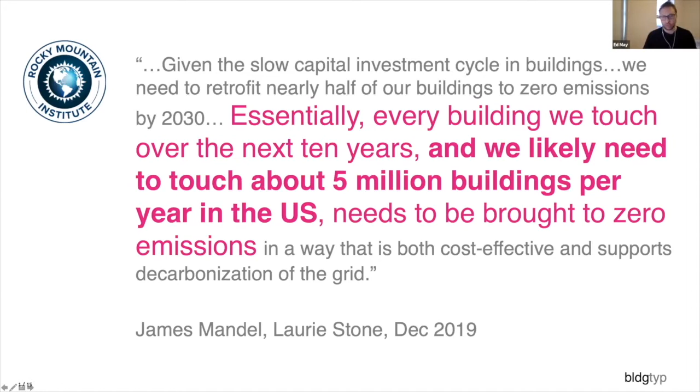So 5 million buildings every year for 10 years. I know this is a happy hour, so I'll do the math. How'd they get that number? It's about 113 million buildings in the US. You want to retrofit 50% of them over 10 years? There's your 5 million buildings a year.

Well, what does that mean? Let me put that in human numbers. It's about 400,000 buildings every month, or to put it a slightly different way, about 13,000 building retrofits to a zero emissions level every single day for 10 years.

To make it even more real, if you're an architect or designer working in the US, there's about 21,000 architecture companies in the US. That would mean your firm would be responsible for about 250 zero emissions building retrofits every single year for 10 years, assuming architects were involved in every one, which isn't always true, but let's say for the purposes of argument this is the order of magnitude we're talking about.

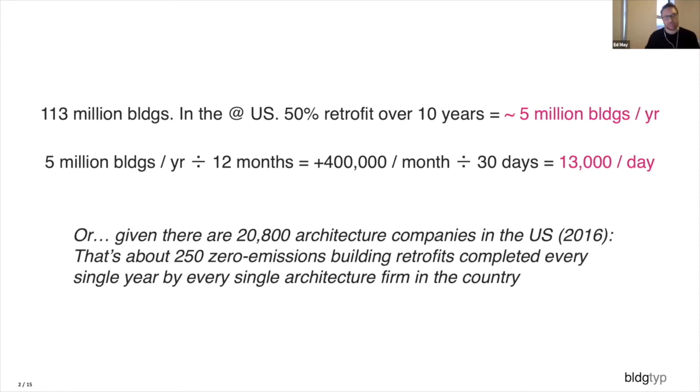Now that's a big challenge, a big undertaking obviously. What I'd really like to talk about on this call is not so much the policy or finance challenges, but our side of the equation as designers, engineers, architects - the tools, design, and process side. I'd like to pose a question to everyone, just as a thought experiment: set aside those enormous policy and financing challenges for a second.

Let's just say, for purposes of argument, the finance people get their act together. They come to us someday and say, guys, we found the money, it was between the couch cushions, it's time to get building, let's go. I want to ask: could you scale up your own Passive House design and engineering process to handle even a fraction of that demand, even a fraction of that amount of work?

Could you do it? Seriously, given how hard you work now, the hours you work now, the time you spend now, how little you see your kids now - could you do it? Could you really scale up your process to accurately, efficiently, and quickly output that level of work? And given that your name goes on every document that goes out the door, would you stand behind it, would you be confident it's accurate? What would it take to actually do it well? Could you?

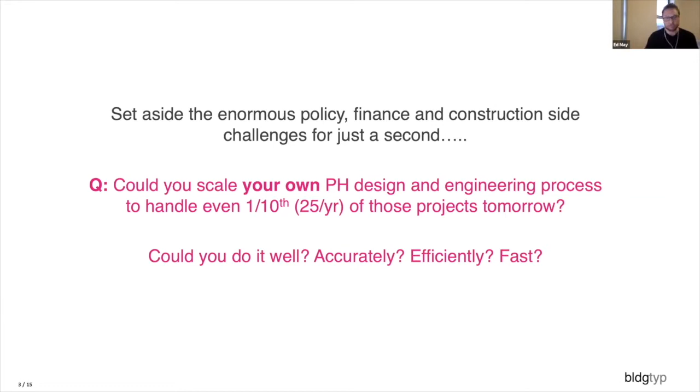Yeah, no, that's what I thought. It's going to take a century's worth of Saturday work to meet a challenge like that, given our current process and timeline for Passive House projects. Now that's not true of everybody's firms - some of you have amazing firms, maybe you're thinking, that's fine, I could totally do that, we could do 250 zero emissions buildings tomorrow. If so, awesome. But most of the firms, myself included, would mightily struggle to attempt even anything close.

So I want to ask, in the few minutes we have together as a community here, what kind of techniques can we use to improve our own accuracy and speed? How can we get better? How can we do a better job of doing our job? How can we deliver better projects? How can we do more of them, better and faster?

I don't know the answer, but I'd like to offer just one partial solution that has worked really well for us in the past. I'll offer a couple examples, and then, as I said, I'd really like to hear other people's thoughts and opinions on these kinds of things.

So the solution I'm going to offer comes from a completely different industry. I actually started out as a builder long before I ever became an architect, long before I ever started doing Passive House projects. In the construction industry, and particularly the woodworking industry, there's this idea of a jig. It's a really simple idea. Sometimes you have to do something really hard, sometimes you have to do something many times.

Sometimes you have to do something really fast. So you take some time and you make yourself something kind of sloppy, something fast, something quick, often kind of imperfect, to help you do your job better, faster, more accurately. And I'd like to pose the question: could that idea, that model, that metaphor be applied to the design profession?

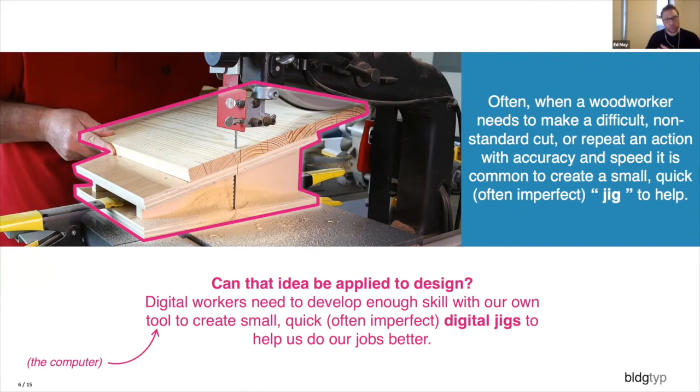Let's take a problem that we run into all the time. You're going to deliver zero energy buildings. You need to model them effectively. We're modeling these buildings and it's a huge amount of data. The data is not getting smaller, the amount of data is not going down. We need to figure out how to manage immense amounts of data. Okay, that's a big problem.

That's a large problem. Let's make it more specific, take it down to a really specific level. How do I manage room-level data? Room numbers, room names, TFA, floor area, volume, fresh air flow rates, air handling hookups—all of the various bits and pieces of information at a room level that I might need to manage in a building information model.

What tool do I use to do that? Do I use a spreadsheet? Do I copy and paste things from here to there? Well, there's not really a tool, is there? I mean, maybe there is, maybe you guys have one—I'd love to hear about it, but I don't know of a tool that does that really well in a passive house context. So let's make one.

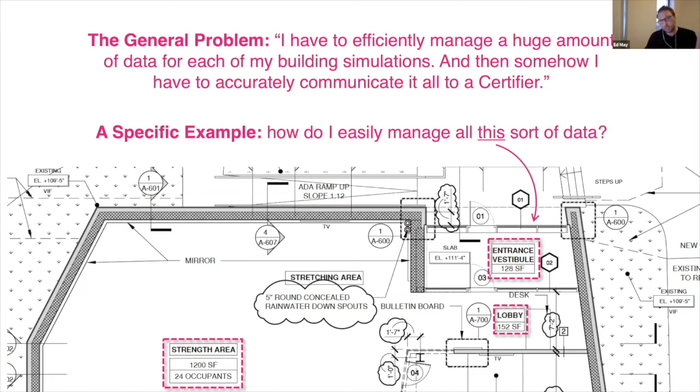Right? We're working in SketchUp, we're doing WUFI Plus modeling, we're doing designPH modeling. We're using SketchUp—that's a fine tool, it's not a great tool, it's a fine tool. So let's build ourselves a little digital helper.

It's about 2,000 lines of code. It's fast, it's quick, it's easy. It's not very sexy, it's not a piece of software—it's a small digital helper to help us do our job better.

And always with an eye towards data flow: the data that flows in has to flow out, it has to flow out to something useful. It can't stop in the Excel model or the WUFI model—it has to flow out to a document, to an actual piece of paper that can be used in a certification context. So we build the tool so that all of that data flows seamlessly from end to end.

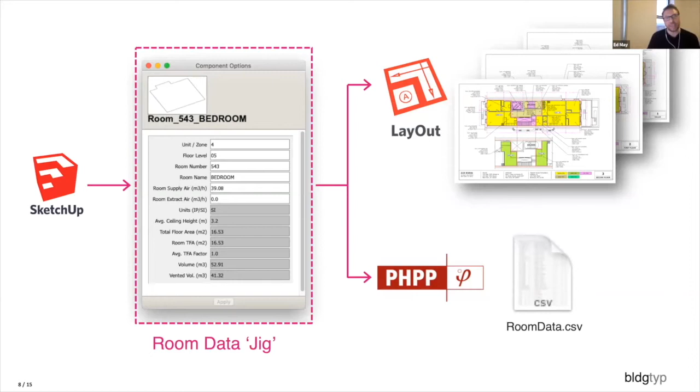How might we use this? Well, we're using it every day on projects. This is the kind of tool we build—we use it on all of our projects to help us do our job better, faster, more accurately. This is a renovation project in Manhattan we're working on with Mike Ingui and his team. Great project, commercial on the bottom, residential up above, multifamily, mezzanine levels, complex interior floor plate.

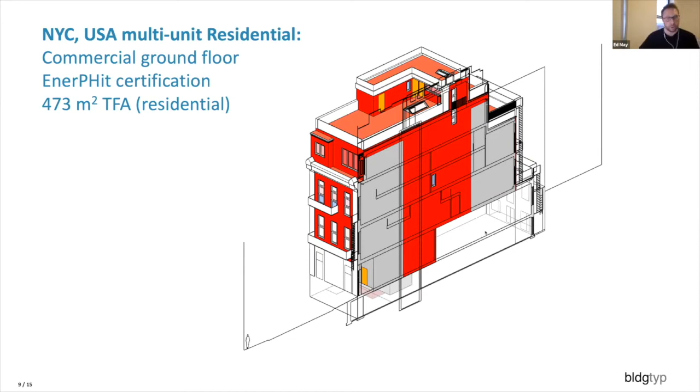How do you manage it? How do you manage the data? You gonna make a spreadsheet, copy and paste? No, you're gonna make yourself a building information model. If there's not a tool that exists that allows you to manage the information you need to manage, you're gonna build yourself a tool, and you're always gonna do it with an eye towards data flow. So all the data that flows in has to seamlessly flow into both the physics model—the energy model—and your final certification documentation and error checking documentation on the back end.

We're not going to do things like write tags about information—we're going to make it so the data actually flows seamlessly into those tags. The computer does the hard work of remembering all this stuff, because you won't remember it. I know I won't remember it. I'll do it wrong, I'll type it in wrong, I'll get a decimal in the wrong place. We're going to make the computer do the hard work there.

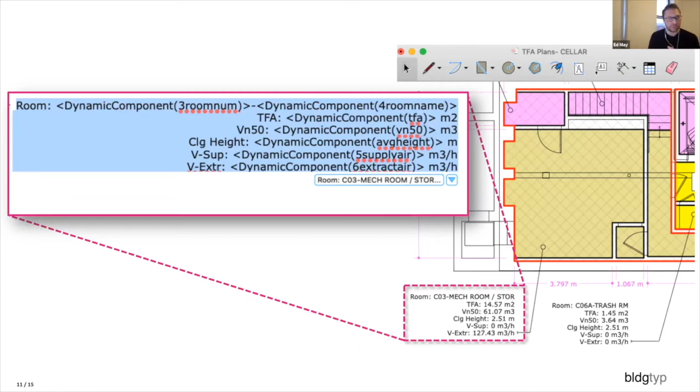That's one super small example, one really hyper-local example of the type of thing we're talking about. Let me offer a slightly more extended example. This is the workflow that we're working with right now.

So for most of our projects nowadays, we've shifted platforms away from SketchUp—not to get too deep into the weeds on the tools, but SketchUp doesn't seem to be a great tool for data management. We're using Rhino, a much more robust information and data management platform. It allows us to do a lot more things, a lot more customizable, a lot more transparent—that's a really important quality in all of our tools that we prize. We're using this to simultaneously create dynamic models and PHPP models from a single source building information model, using a tool we internally call IDF to PH.

If you do Energy Plus modeling, you know IDF files. We're able to translate back and forth between IDF files and passive house files, or PHPP files. But the important thing here is not the physics modeling. That's all pretty well understood at this point.

That's pretty well managed. The important piece here is about the data flow in and the data flow out. So we have a whole new set of tools that we're using to push data in and manage data. And just as importantly, on the back end, we've got a bunch of data flowing out into an automated reporting tool. In particular, we're using a web-based reporting tool. So, yes, we used to do, and we still do, quite a few PDF reports, make a bunch of Excel graphs.

That's not great, right? That's not a great process. That's not very automatic, and it's time consuming. It's prone to user error. It would be much better if we could come up with a process where the data flows seamlessly from your data, your building information model, through the physics model, and manages the fire hose of data that comes out of those physics engines, those physics models, whether it's PHPP or Energy Plus or what have you.

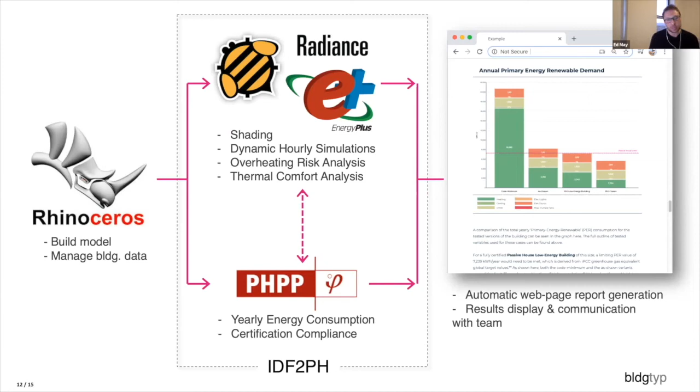So we do an automatic web-based reporting that parses through the data, scrubs the data, turns it into something human readable and manageable. What does that look like?

It's really straightforward, right? So there is no building information management tool to do that in Rhino currently. Okay, fine, build yourself one. So a couple thousand lines of code. You're gonna manage component libraries, windows, surfaces, TFA, domestic hot water, thermal bridges. It's no different than DesignPH. It's not hard, there's no rocket science here. You build yourself a tool to manage the data properly.

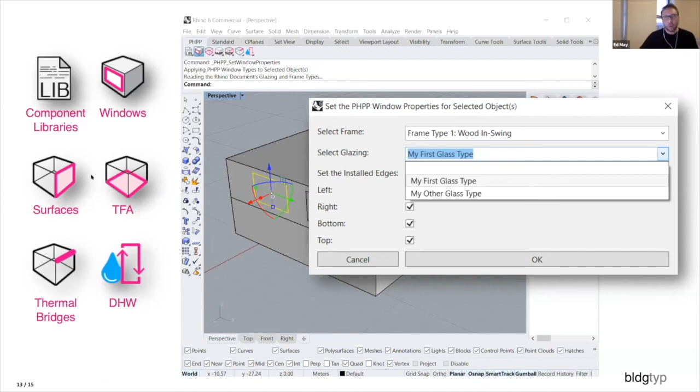So all the data gets input in this information management, or building information management, tool. And again, on the back end, we're going to use a web-based platform to allow us to see and parse that information very easily. So this is just an example of the type of web page report that we create now for projects.

This is obviously just a small single family project. This is an automated report. So this is rigged up and connected to the PHPP. And the important piece here is that it's a live web page. So all of this data is updated as the PHPP updates.

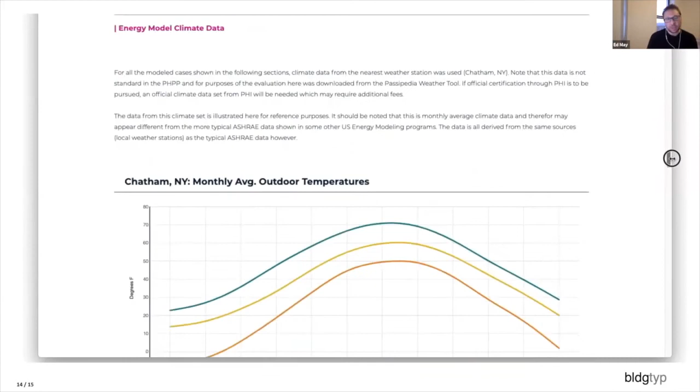The whole team is able to see the updates in more or less real time as we choose to update them. But the most important part is that it's code. They're not pictures, they're not JPEGs, they're not copy paste, they're not screenshots out of an Excel model. It's code, it's building itself.

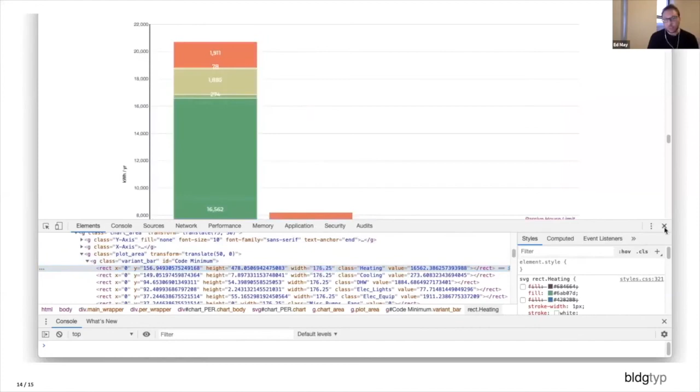We don't build the web page. We set up the structure, we feed it the data, and it creates the model every time that we update our PHPP or we update our modeling. It radically improves the amount of time it takes us to create a product like this.

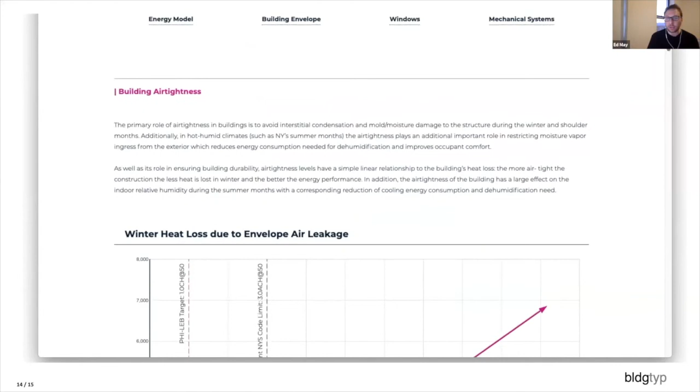In addition, I just want to show here, I like this part very much. We added in a little bit of section here so that we can manage additional data in addition to the stuff that just comes out of the model. We're also able to log things like our inputs. So for instance, I have to keep track of all my wall assemblies, different materials. Well, keep track of it all inside of something like a web page, right?

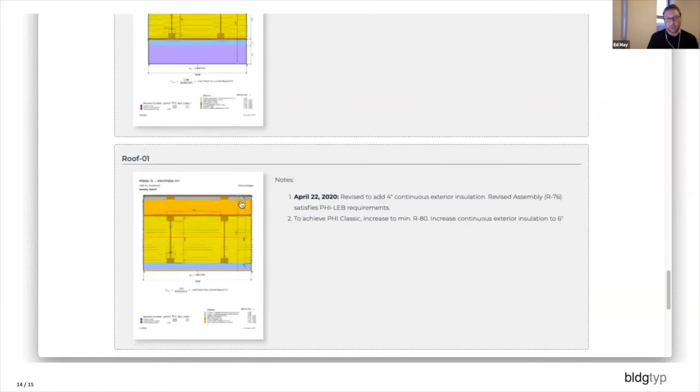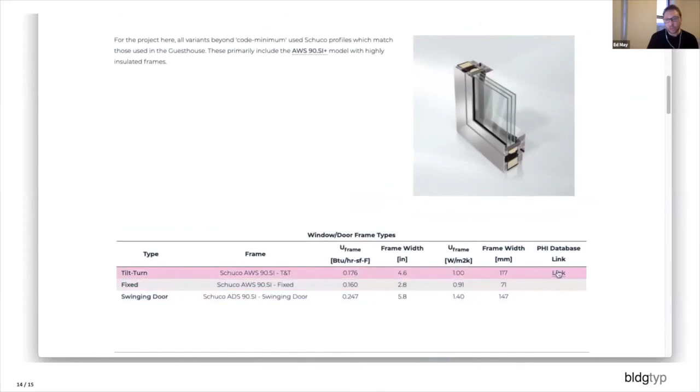That's going to be better than some dead Dropbox folder. Keep track of communications with our contractor friends. We're able to submit details through them. We can provide links to different products that we might like. All of this, again, is largely automated and live. It's rigged up right to our information model.

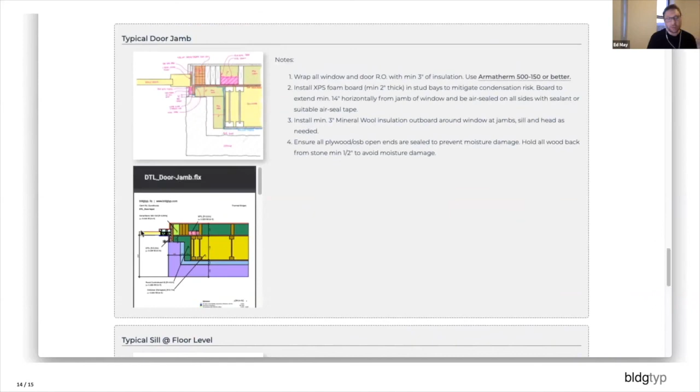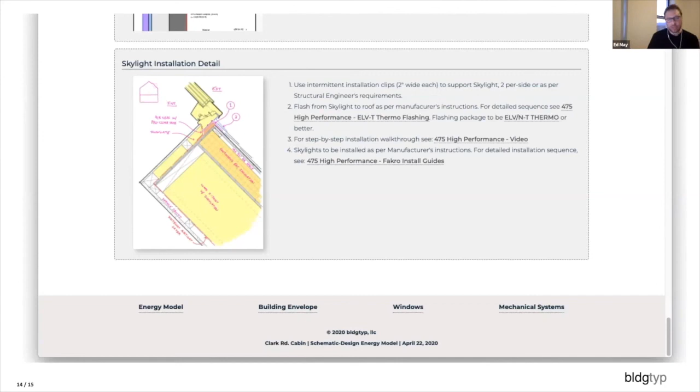We're able to do things like shading calculation and again, represent that relatively quickly. The important part here is the data flows very easily from one to the other. We have all our thermal simulations, we have window and door details. All of that stuff can easily get logged in something like a little mini project website here. It's not a big Procore site. It's not very high tech. There's really nothing fancy to it, but it allows us to manage that data really efficiently.

And again, the most important thing here is that we're making the computer do the hard work. I'm not very good, I don't pay attention to things very well. I can pay attention once, but as soon as I have to do it again, I start to lose track and I start to screw things up. So I make the computer do all the hard work. You build the structure and you let the data flow and you let the model work.

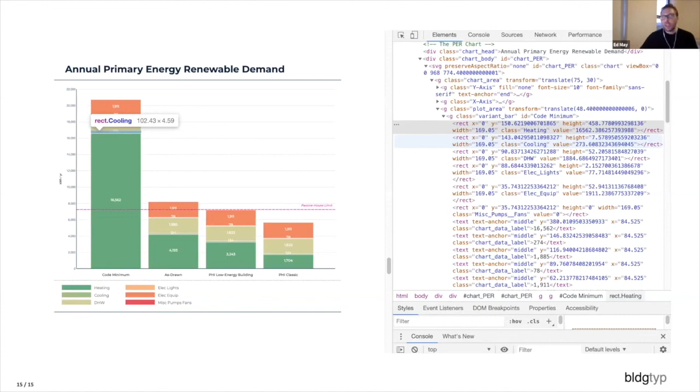And so I would like to propose that we all need to begin to build those skills. These are critical skills for people who work in front of a computer every day, and they're critical skills if we're ever even going to come close to, as an industry, satisfying the type of demand that we know is coming down the line when it comes to things like building energy retrofits over the next 10, 15, 20 years.